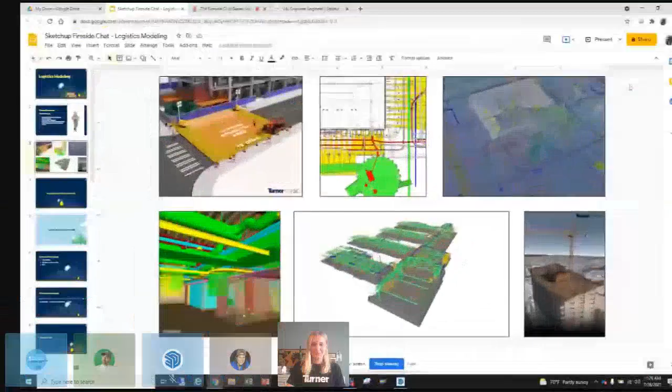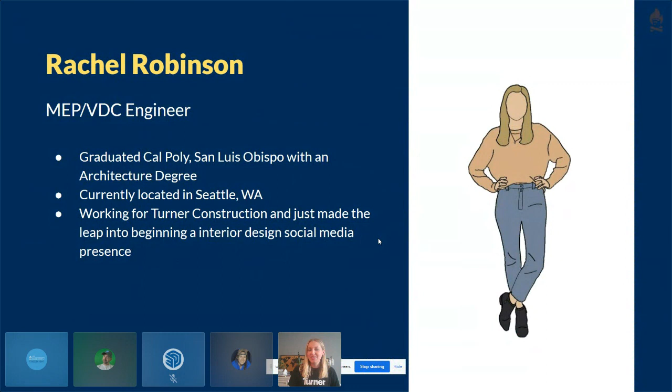Let's begin here with our little intro. So as we've alluded to for the whole previous part of this fireside chat, we'll be going into logistics modeling. A little recap on myself. I'm a VDC and MEP engineer here at Turner Construction, which is a general contractor. I have my degree in architecture, currently located in Seattle, Washington, and have just made the leap into beginning an interior design social media presence as a hobby.

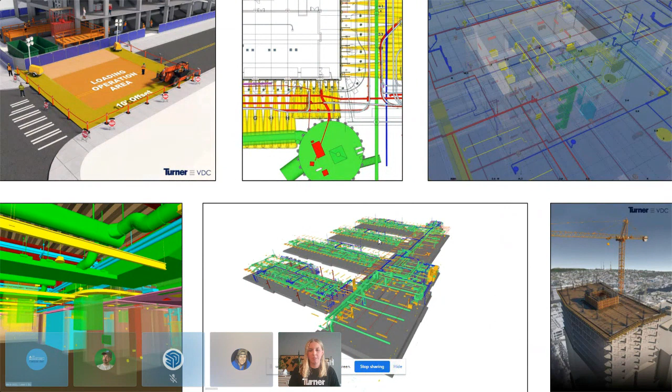A little bit about VDC. Within Turner, we've got this department and we support all ongoing projects. This involves clash detection, coordination, logistics modeling, 3D printing and CNC routing. We've got VR, as well as estimating, scheduling. The list goes on and on for the ways in which we support these projects virtually. And like I'd mentioned before, really the goal of VDC is that we're building projects digitally ahead of time. And so with that, I'm going to hop right into what I wanted to talk about today, because there's a lot of really awesome information we're going to go through and check out.

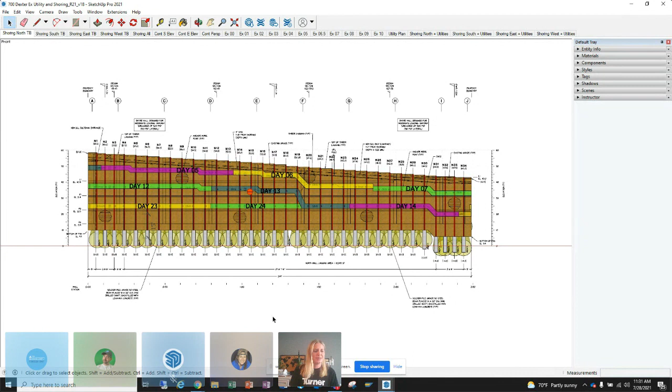So I'm going to start here, one of my models I've got open, and talk through a little bit how we go about logistics modeling here at Turner. So one of the most important models that are generated for each project is this logistics plan. It consists of the execution, procurement, delivery, transport, all the resources that go into a particular site. Each site and each project is different. And so developing this with the team is critical for the project's success. As you can tell here by the title of my SketchUp, these are ever evolving throughout the project.

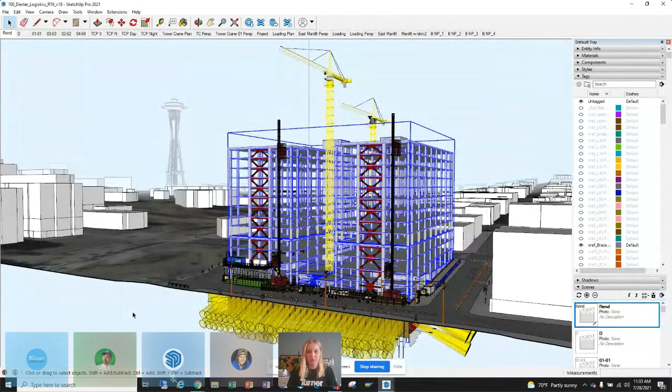So we'll be talking about 700 Dexter today, a project located in the South Lake Union neighborhood of downtown Seattle. And this right here, we're on revision 21 version 18. So it's pretty well developed. This is currently under construction. It's pretty far along. And so I'm going to dive in a little bit as to how we compile all of this information together. So this is what I would consider our, quote unquote, new instance of SketchUp. So I'm not in the native logistics model file, which is this one we've got here. You can see the Space Needle in the background. Nice. I'm in a new instance.

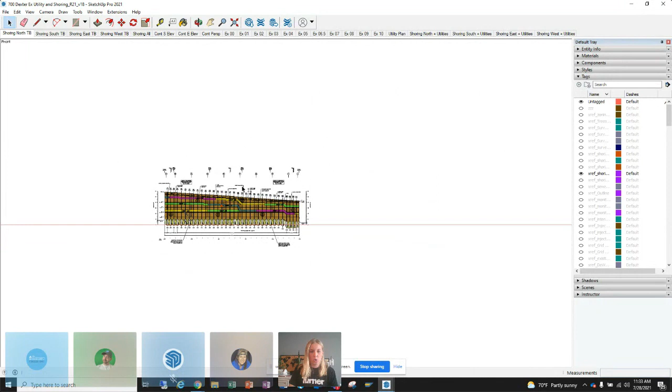And this one in particular, we're diving into the underground. So shoring, we've got some contaminated soil on this job site, as well as a ton of existing utilities because we're downtown in the city. So how we begin going through and setting these models up in SketchUp is we first set coordinates. And so I'm going to kind of zoom out here a little bit and show where we are set. This is typically done by our survey team, and a lot of times it actually is related to our Trimble points that we'll use out on site and that we provide to our subcontractors.

We've got here, the coordinates are 2,000 feet, 1,000 feet. And so this means that we can now kind of orient and model everything per the grid for the project, as well as these coordinates. So they all drop into the exact same point. So we're able to build this here, but then I can easily copy and paste what I need into that master file.

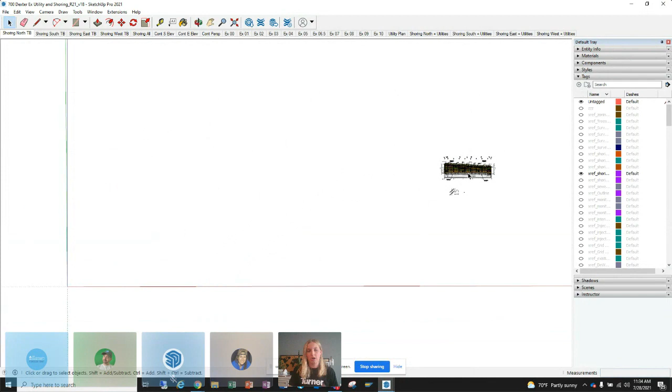Once we got the coordinates set up, we import in our 2D drawings. So the drawings that most people know that we are working off of, our construction set, are all mostly in 2D. These here are some shoring drawings. And we then put them and orient them where they will actually be placed in the project.

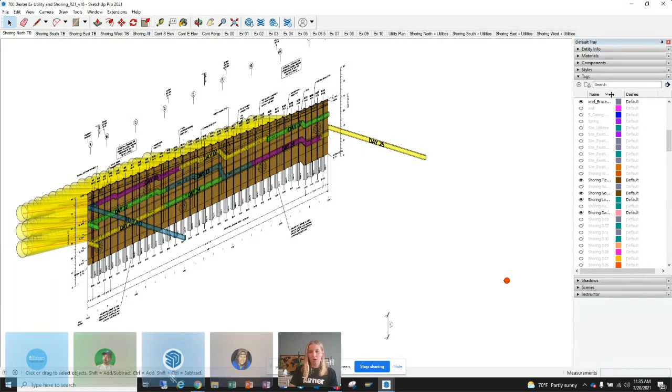From there, we have those labeled typically as XREF as our layering system. And then we are really careful in actually modeling this in 3D by providing all of these their own layers. So you have the tiebacks, the wall, the lagging, and then you can see, as this one has been in the works for a while, the plan of what days we're going to excavate down into the dirt.

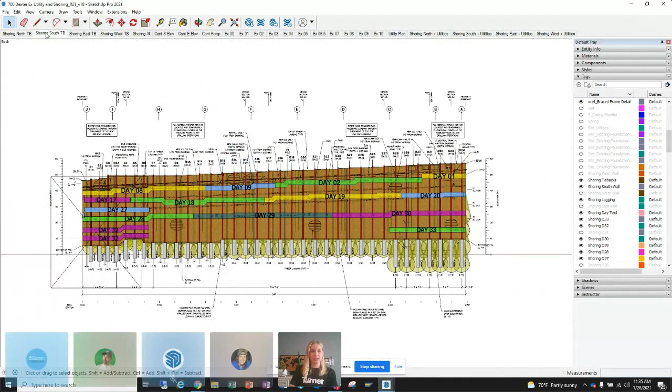I can show you a couple different views of what these are looking like each side. I got the north, south, east, and west. And so this is really our workflow of how we begin to combine all of these drawings together, as well as you can see we utilize scenes a lot. So a lot of layers, a lot of scenes. It's a huge amount of information just right off the bat in a single model.

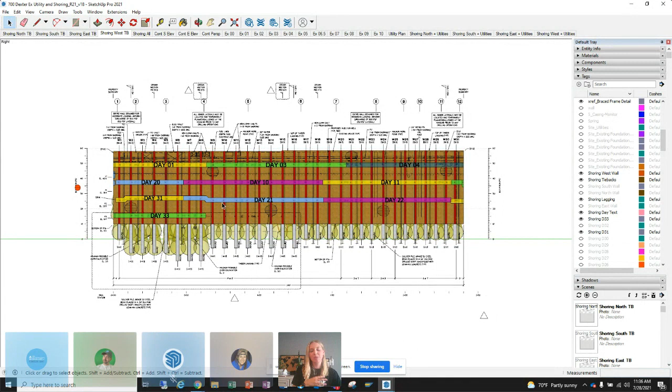That's amazing. It is. Yeah. This is so much better than when I used to have to redline these with highlighter. Yeah, exactly. And we still do a lot of that while we're working through this, but just being able to visualize the whole piece. Let's see this next one up here.

Boom. We've got this now in 3D, and you can see the extents of the site, the plan of that excavation day to day. And then you have all of these tiebacks so that as we go through, we can see here our utility plan and all the existing utilities that we grabbed based on survey points, we can start layering this information in. This working file, of course, was for existing utilities and shoring. But we also then add this all back into that master logistics model.

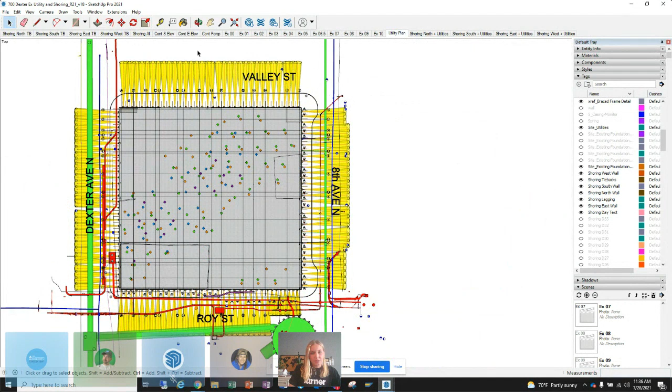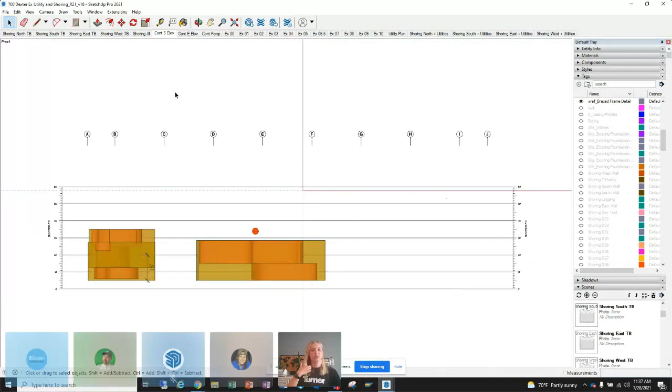So something that's really unique about this project, which I think would be nice to note, is I think it was an industrial laundromat that was on the site originally. And so there was quite a bit of contaminated soil. So with that, we were able to take the drawings that we had and model in exactly where these nodes and areas of extra contamination were, and then what had to be fully decontaminated outside of that.

And again, place it where, let's see, we can click through some of these sequencing of going down day by day, and boom, you can add in the contaminated soil, and you know exactly when you're going to hit it first on the site.

I just want to call it out, because we work with a lot of people who are making models, and you have a beautiful model here, but it's so cool the way that you're using the same file, the same model, to switch between 2D data and then 3D representations, and all of that's together. That's really cool. And obviously a big part of that is management of quite a lot of tags and then organizing the scenes to show them.

Exactly. This is a process that we in the VDC department have fine-tuned because not one person is typically solely involved in modeling all of this, right? So each different piece might be parceled out and tasked to any of us in particular. So doing a quick hop over here, my involvement was helping in modeling these steel trusses. So it's a big team effort.

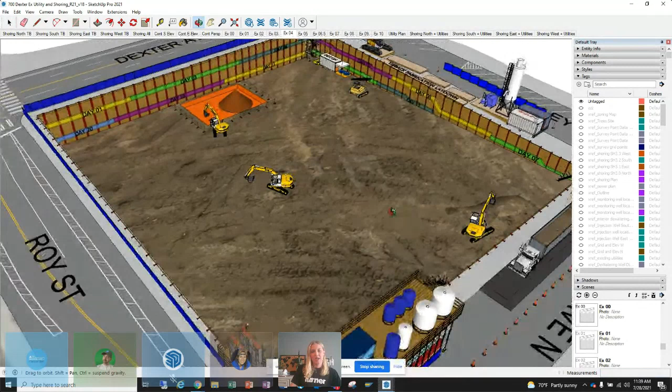And we also utilize the 3D Warehouse a bunch. So you can see here, we've got trucks and water tanks and our little excavators. And some of these we will build or modify to fit our project needs, but we utilize, oh my gosh, that warehouse constantly, which is one of the reasons why we use SketchUp for our logistics modeling. Mm. All right.

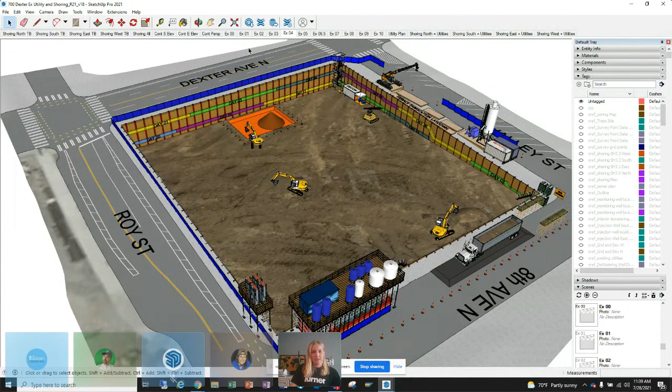Moving right along. So we can start back at the beginning here. This was used in a ton of meetings, and there were a lot of iterations involving how we were going to excavate. Timing wise, as you can tell, this site is huge. I mean, it's an entire city block, and the blocks here in the South Lake Union neighborhood are pretty large. This project, as you can tell, is 2 buildings with this kind of interconnecting pathway between with some cascading stairs.

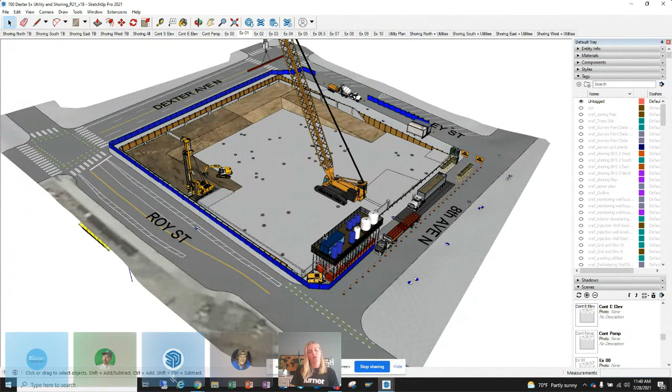So with that, we went through and planned this out step by step with the team, with the superintendents who are really in the nitty gritty of the scheduling and the true timing and what really needs to happen on the project. We were able to step by step figure out, okay, when are you going to hit that contaminated soil? What mitigation do we have to do? And then really, when are we going to get out of it? So that's what these were used for.

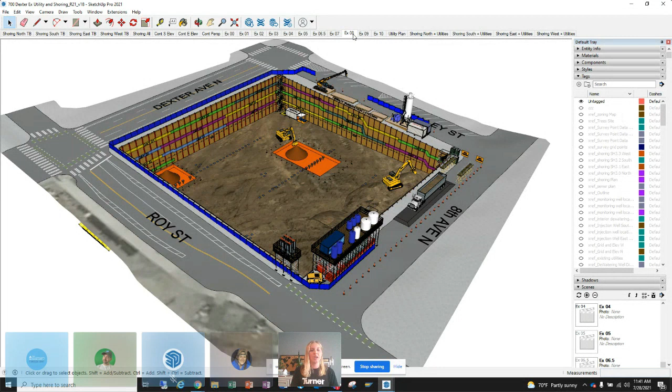And a lot of times we'll go into the logistics model as it's ever evolving and create scenes for what we want to use to help the project team, to help with the owner, architect, whoever we need to convey this information to. Because again, 2D drawings are great, but seeing everything combined is just so incredibly helpful. Yeah, I mean, that 3D representation of soil level, that's got to be hard to beat.

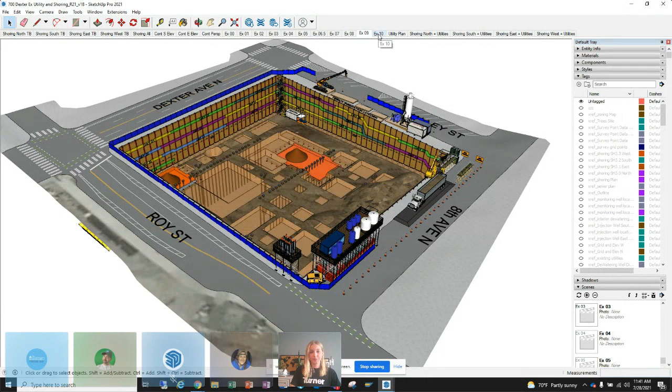Yeah, right. You're seeing the full picture of, hey, this contaminated soil goes all the way down into the foundations, and that you're really going to be spending quite a lot of your excavation and time hitting this contaminated soil. It'll get a lot easier to do quantity takeoffs and things too, I imagine. Yes, and we do that all the time. We do quantity takeoffs, we do a lot of estimating and building estimate models because the 3D tool is significantly easier than just having those 2D drawings.

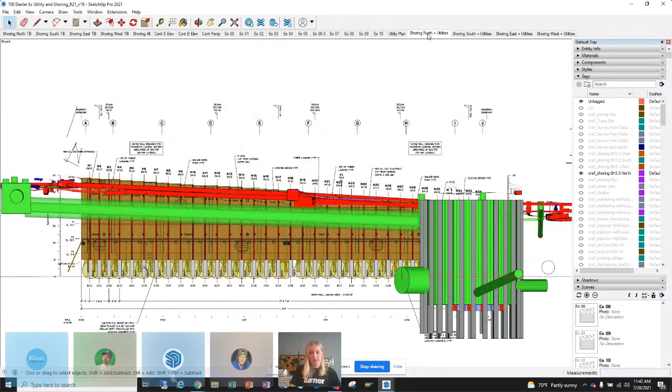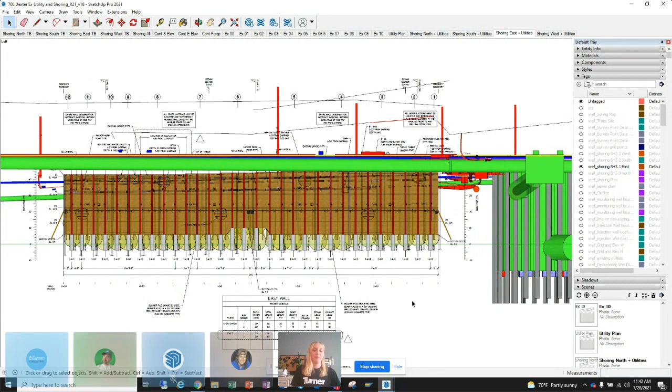Within this model, there's just a couple other views we've got overall that help us out. And you can see these still have those drawings, those layers on, but typically we do not carry a lot of these 2D drawings just because they bog down that main model. I think it's time to hop into this guy. So I'm just going to show a couple of ways in which we use this master file.

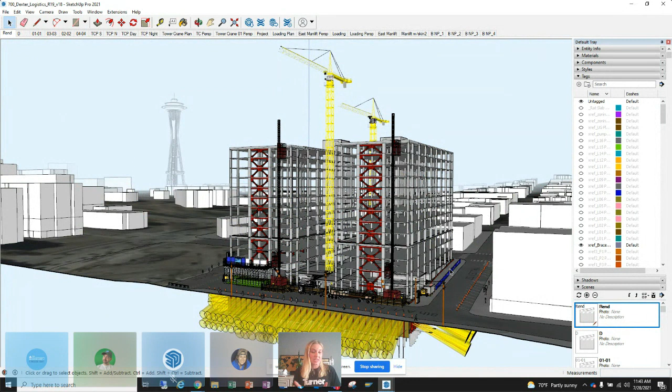So with that, in terms of being in a big city and utilizing the exterior, not within the building site but exterior to that, how we're going to get around, close things off. What we call a TCP is our traffic control plans. And so we will go in and utilize these logistics models to figure out where do we need access to best facilitate getting materials and people, and really trying not to disrupt the regular flow of traffic and of parking. We're trying to limit it to the best of our abilities, right? We don't want to impact as much as possible.

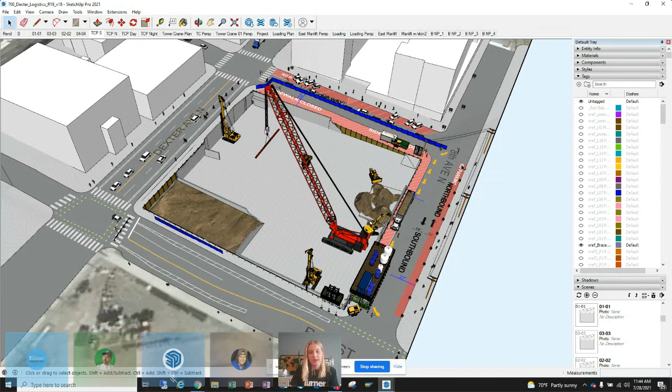So we spend a lot of time going through and creating really multiple iterations of these TCPs. This one's for the south side. So we've got no parking, the sidewalk's closed all along here, as well as no parking on the other side. And so you'll see that during the day, that is what we've got going on. And this is our plan for getting trucks loaded, and then unloading is on this 8th Avenue.

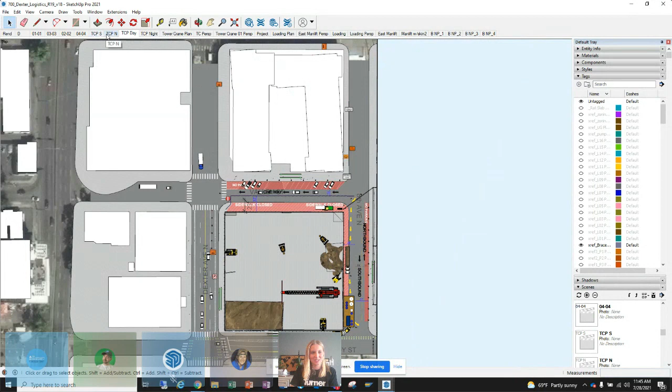But then you also have at night what we end up opening up, which is more parking for the buildings across the street. So again, we utilize a lot of the warehouses you can see for people and cars, and just putting that full picture together. I think we actually showed this to the city so that we could get the approval of what our plan was for the site. Wow.

All right, that's right. Awesome.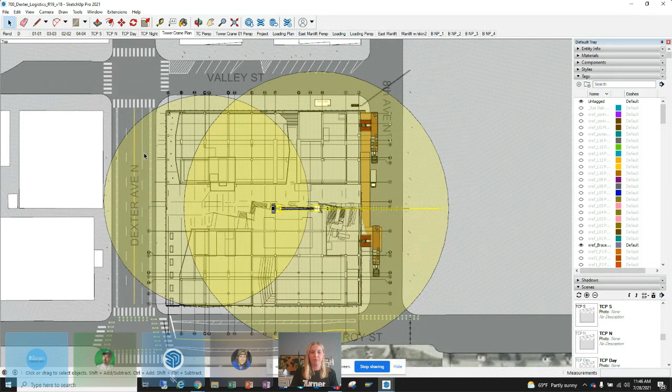But like I mentioned, it's just such a big site that we implemented the 2. And really, we utilized this model to figure that out, and also in terms of the placement, to have minimal impacts and work that we have to do after that crane is removed from the site.

You can see it in perspective here. A lot of times we'll take some components from the warehouse and then also build our own to, again, customize it based on our needs. And we also will have different scenes with all of these different layers turned on. And I have these open for you guys to see so that you can see every time they're shifting and changing what you can see and what you can't, and the view.

So this one's actually flipped around. It's kind of like I'm at the Space Needle. The Space Needle's a little farther away, but I'm peering down. You can see Lake Union. And this one also is showing you the whole facade system that we've got on this project. So a lot of times what we'll use this for is, we need to grab a snapshot for our client, or again, using it in many different meetings.

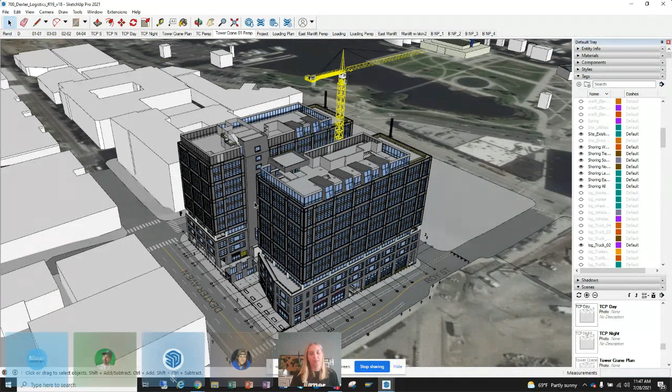Very cool. Okay. All right. And so now for the people transportation, our man lifts. I'm trying to click through and see what the best one is first. It'd probably be this guy here, a couple of perspectives. Because of the two buildings, they do have interconnecting sky bridges, but for the majority of the project, we would not have them constructed. And so we really needed to narrow down having two of these man lifts.

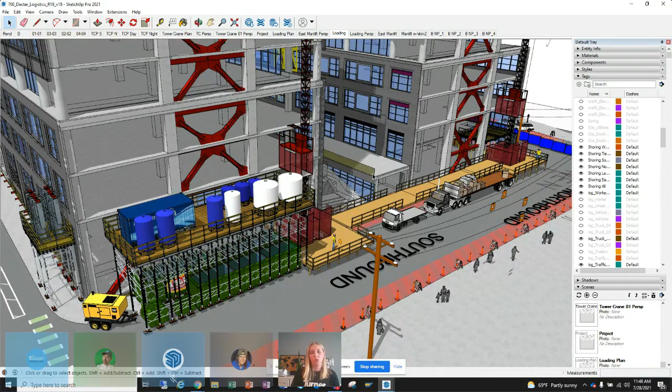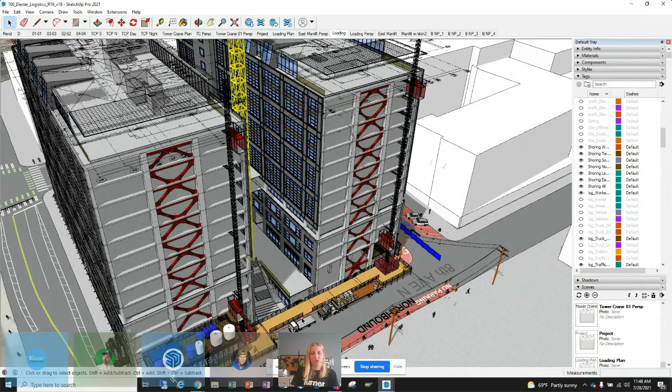So it can carry small goods, but also because Turner works on pretty large commercial projects, going up and down, I think this is 11 stories, by stair is time intensive and just intensive on the body in general. So we were able to set up this whole loading dock situation on 8th Avenue. You can see we have our water, our tanks. We have where trucks are delivering here, as well as these docks that connect and bring you to both man lifts.

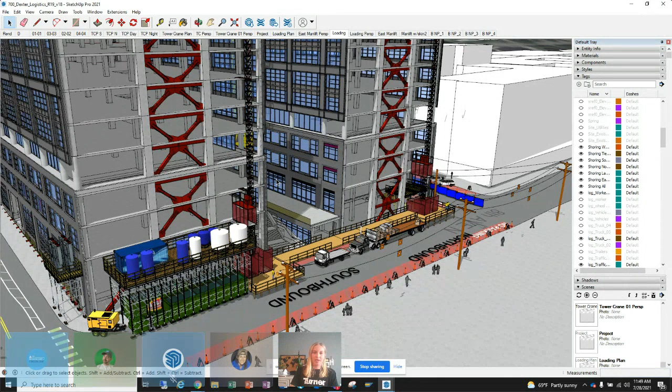And this one here, we were trying to make sure that the facade, we left out the portions that we needed to allow for having this man lift here for a certain amount of time on the project.

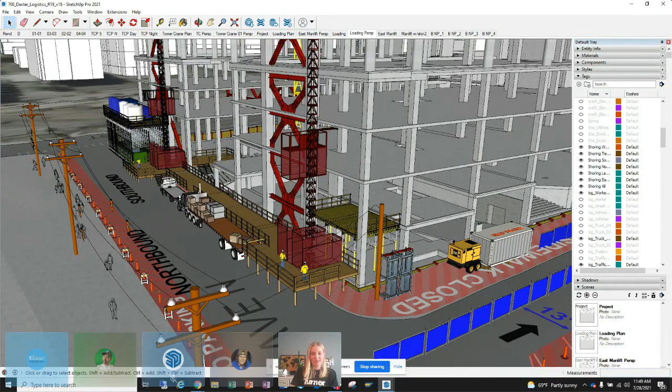I'm just geeking out on how much information we've gone through inside of a model. It's amazing how much is there. Yeah, the attention to detail is incredible. Even though I've seen you flip through this before, I still get lost in it every time. I know, right? My team, we've even got the electrical poles and our cones and everything. Even our people here, I'm pretty sure they even say Turner on them. Yep. It's really awesome. And again, it's just layers and layers of information.

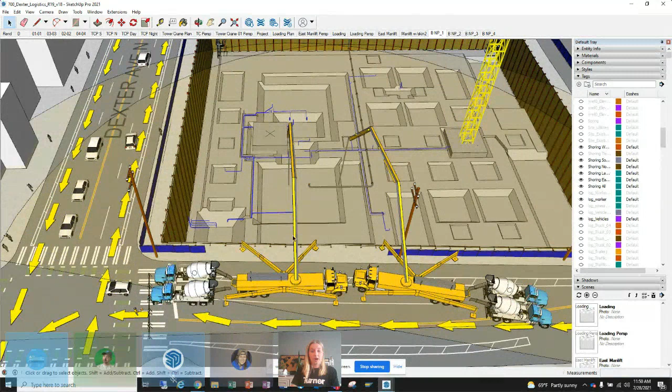Let's see. I think to wrap it up, I've got another example of how we've utilized this with the project team. You can see all the arrows we've got on the street. So we're down to the bottom of our excavation, and this was trying to figure out our plan of doing our concrete pours. So you've got concrete trucks and then the booms, their distance of what that reach is looking like. So I'll click through these just briefly, just to show you guys another way that we utilize this.

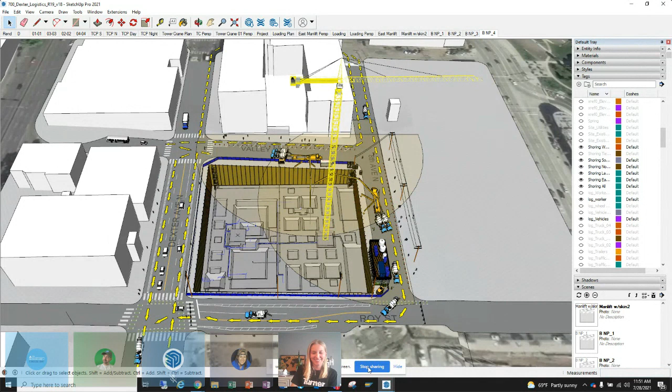Bunch of information. Of course, we'll have our question and answer after this, so you can ask me all that you want, because I know this is a lot. But I think this is all I have. I will stop sharing my screen. Awesome. That was crazy. Amazing. Yeah. Thank you. I know I was watching questions come up, and we have a lot of questions.